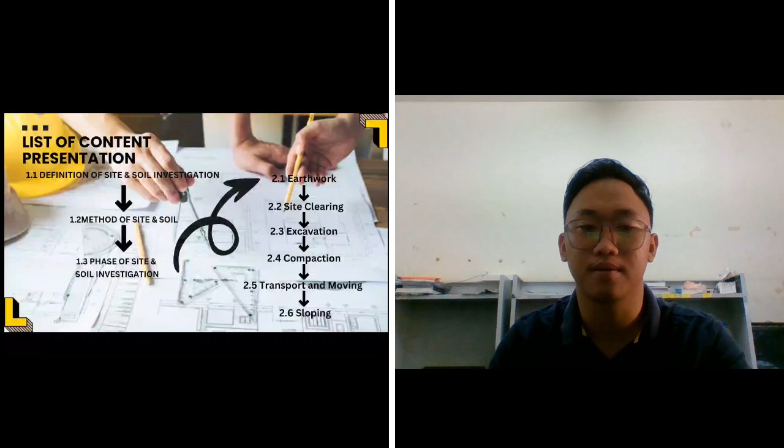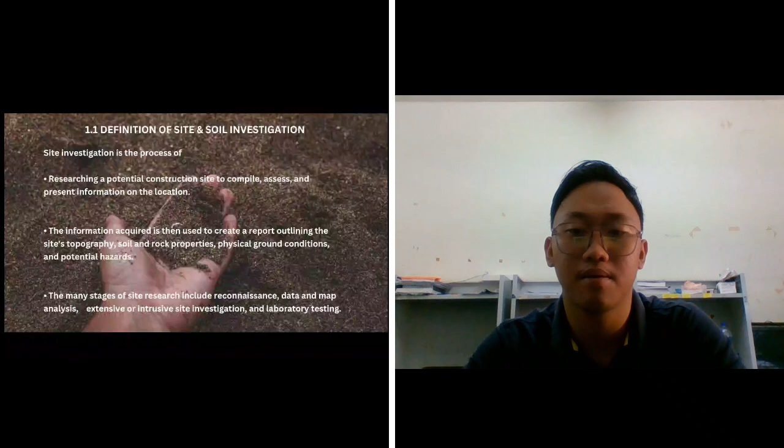What is site investigation? Site investigation is the process of researching a potential construction site to compile, assess, and present information on the location. The information acquired is then used to create a report outlining the site topography, soil and rock properties, physical ground condition, and potential hazards. The main stages of site research include reconnaissance, data and map analysis, extensive or intrusive site investigation, and laboratory testing.

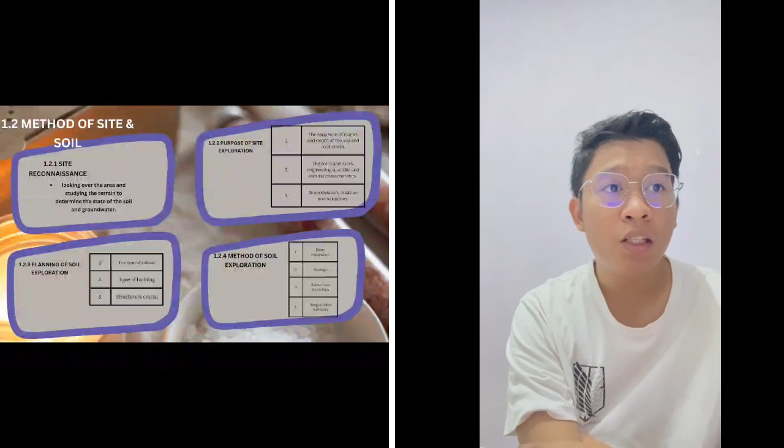1.2 Method of site and soil investigation. First, site reconnaissance is looking over the area, studying the terrain, and determining the state of soil and groundwater. The second is the purpose of site exploring: first, the sequence of layers; second, the soil, rock qualities and natural characteristics; third, groundwater location and variation.

The third is planning soil exploration: first, what type of subsoil; second, type of building; third, the structure is crucial. The fourth is method of exploration: first, open excavation; second, boring, surface sounding, and geophysical method.

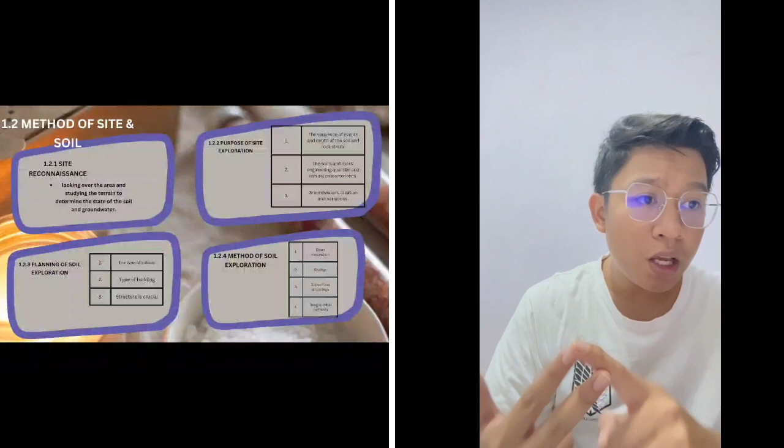Second is the boring method. For boring method, there are two: drilling holes and observing cuttings as they emerge from various depths, and lifting soil samples from various depths using a sampler. Examples of samplers include auger boring, shell and auger boring, wash boring, percussion boring, and rotary boring.

The third is subsurface sounding, which comes from SPT, standard penetration test, and cone penetration test, also called the Dutch cone test. The fourth is the geophysical method, including electric resistance method and seismic refraction method.

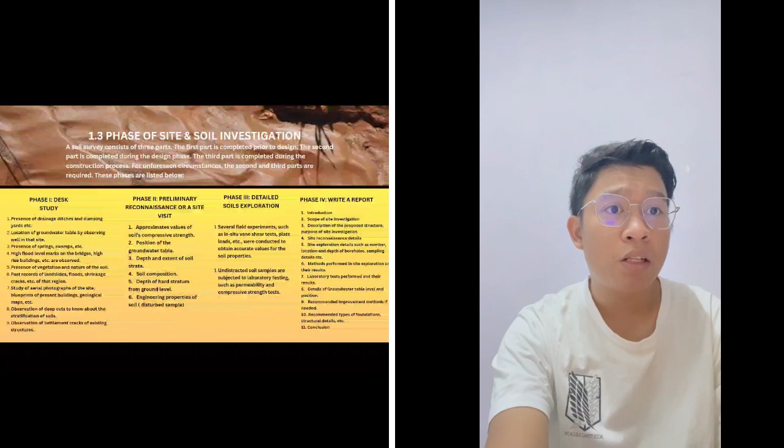1.3 Phase of site and soil investigation. A soil survey consists of 3 parts. The first part, prior to design, is the desk study. The second, completed during the design phase, is preliminary reconnaissance, also called a site visit. The third part, completed during the construction process, is phase 3, detailed soil exploration. For unforeseen circumstances, the second and third parts are required. The fourth part is writing a report.

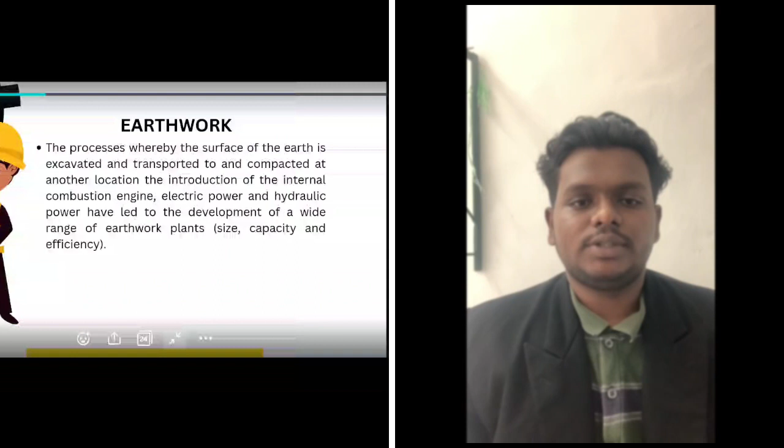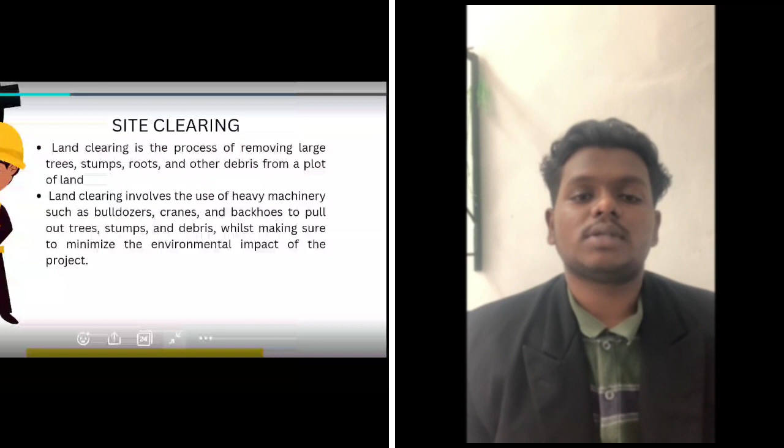Land clearance is the most effective way to prepare a place for development. Large trees, stumps, roots, and other debris are removed from a piece of land through the process of land clearing. This enables builders to continue the process of creating a new office building, a housing development, and a road. To remove trees, stumps, and other waste from the land, heavy equipment like bulldozers, cranes, and backhoes are used, while also taking precautions to reduce the project's negative environmental effects. The influence on local fauna has been minimized.

Workers can begin preparing the land for development once it is recovered after the ground has been cleared. There are 4 different excavations applied in these projects. Topsoil excavation, as implied by the name, entails the removal of the exposed highest portion of the earth's surface. Rock soil excavation is used to get rid of construction barriers like stone surfaces. Mud excavation: mud, a mixture of soil and water, is frequently present and needs to be removed during construction. Lastly, earthwork excavation.

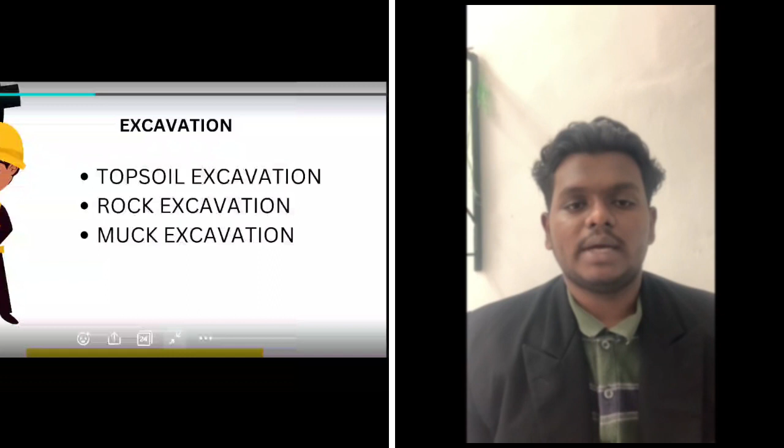Earth excavation for building involves removing soil or the layer below the topsoil. During the technique, wide and shallow layers of topsoil, pebbles, sands, and other unwanted materials must be removed. The technique also includes grading the land.

Trench excavation is frequently used for project foundations, sewer system service lines, and pipelines. This method of excavation has been used to dig shallow trenches up to 6 meters deep.

Dredging is a technique of excavating and removing underwater sediments and debris to make way for construction needs.

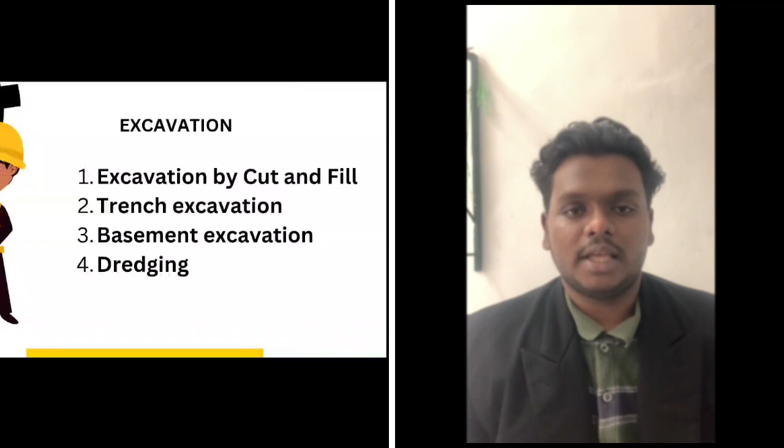CF220007. I will present one of the methods in earthwork construction, which is compaction. What is compaction? Compaction is the process of increasing the density of a soil by packing the particles closer together through the application of external force.

Compaction cannot be effectively achieved by track machinery, as tracks distribute the load over a wider area, effectively minimizing compaction.

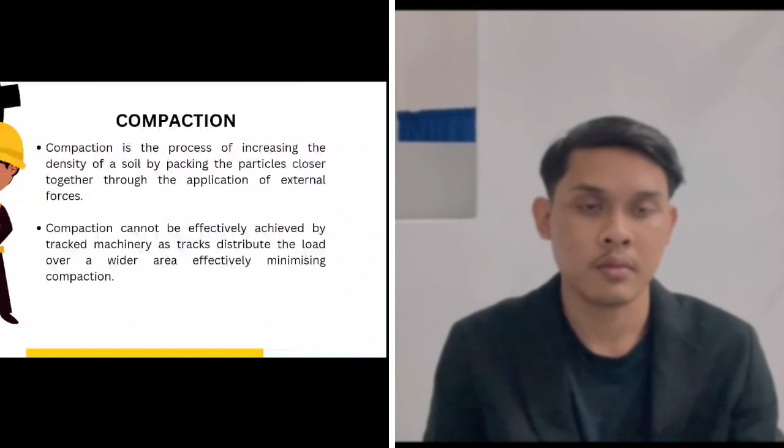Compaction process for cohesive soil. Compaction of cohesive soil is achieved by impact and weight to break down the cohesive bond and increase the soil density. Kneading compactors with high point loads, such as sheepsfoot and pad foot rollers, are required for cohesive soil. The strength of cohesive soil is influenced by moisture content.

Compaction process for granular soil. Compaction of granular soil can be carried out with static compactors that simply apply weight and tend to compact from the bottom of the layer up. Vibratory compactors use a mechanical action to consolidate soil particles. Impact compactors use high amplitude whack to compact material. Granular fills are usually suitable for fill construction, as strength is usually adequate over a range of moisture conditions.

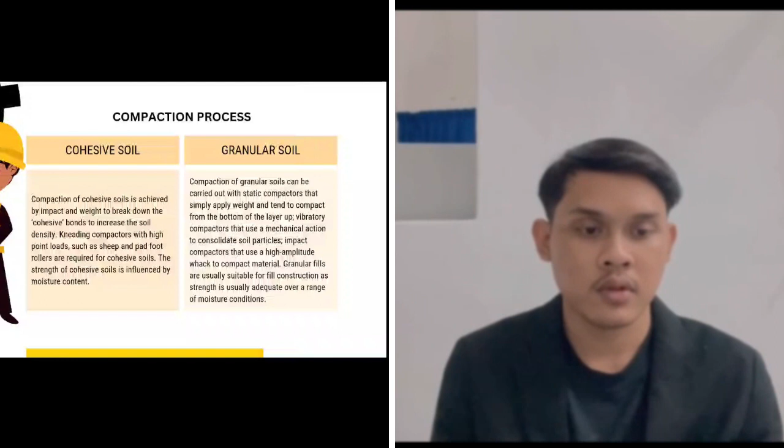The purpose of compaction: first, increase bearing capacity. Second, reduce compressibility. Third, reduce permeability. Fourth, improve stability. Fifth, heavy or highway versus building foundation compaction operation.

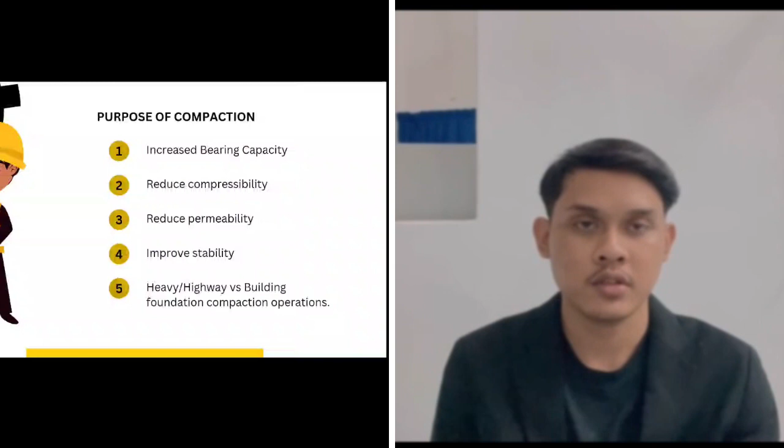Now I will discuss the factors affecting compaction. First, moisture content. To achieve the desired density of the soil, the moisture content has to be controlled properly. If the water content is low, it leads to soil being stiff, which resists compaction. When the water content is increased, lubrication takes place between the soil particles and the soil becomes more workable.

Second, type of soil. The soil type influences the compaction of that soil to a great extent. The coarse-grained soil can be compacted to a higher dry density than the fine-grained soil. The maximum dry density decreases if the quantity of fines is increased beyond the amount required to fill voids in the coarse-grained soil. Hence, it is safe to say a well-graded soil obtains a much higher dry density than a poorly graded soil.

Third, amount of compaction. The optimum water content required for compaction decreases with an increase in the compaction effort. This effect of increased compaction is significant only until the water content reaches its optimum level. After that, the volume of voids becomes almost constant and the effect of increased compaction is not significant.

Fourth, contact pressure. Contact pressure is the pressure between the soil and the wheel of the equipment used for compaction. This pressure depends on the weight of the roller, the wheel, and the contact area. Higher contact pressure increases the dry density and lowers the optimum moisture content.

Fifth, speed of rolling. There are two important things to consider. First, the higher the speed of rolling, the more length of embankment can be compacted in a day. Second, the higher the speed of rolling, there is a likely chance of insufficient time for deformation to take place, and hence more passes may be required to achieve the desired compaction.

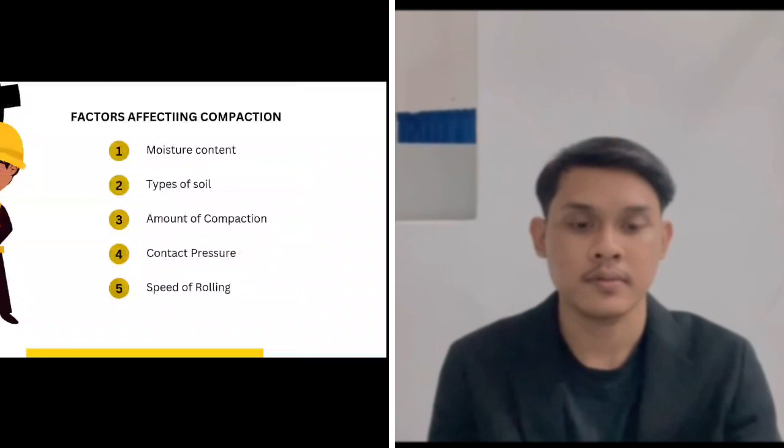There are 7 types of compaction equipment: tamping foot roller, grid or mesh roller, vibrating compactor, steel wheel or smooth steel drum roller, rubber tire or pneumatic roller, segmented pad roller, and tampers or rammers.

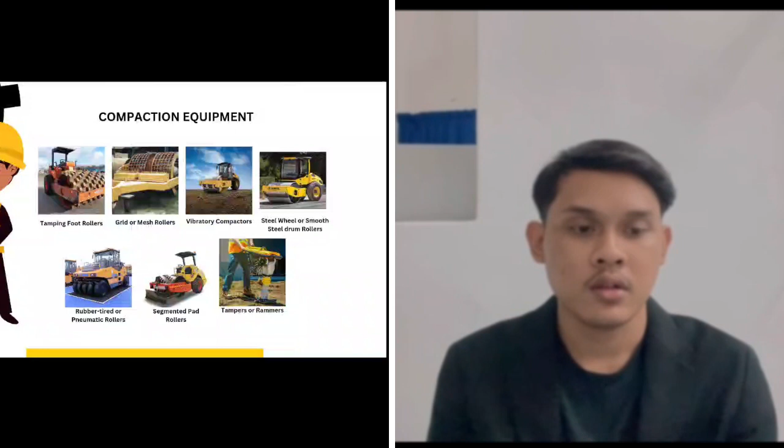There are 5 methods of compaction. First, static weight. Static pressure is the most common form of compaction. Virtually all objects exert some degree of static pressure compaction.

The greater a particular weight, the more static pressure it will exert. Second, impact. Both static pressure and manipulation harness the power of gravity to accomplish a compaction. Impact compaction takes a more proactive approach. Here, the compactor literally hits the surface of the ground. This contact increases the amount of force it exerts. It also sends a localized pressure wave straight down into the ground.

Third, vibration. Vibration forces are closely related to impact force. In fact, the two can be easily confused; where impact compaction involves force that moves straight down, vibration compaction consists of pressure waves that spread out through the ground in all directions. Fourth, manipulation or kneading. Manipulation, also sometimes referred to as kneading, acts to compress material at a greater depth. It does so by reducing the surface area at each particular point of action. This enables the compactor to exert a more localized and hence greater amount of force in each particular area.

Finally, percolation. The concepts of percolation theory are used to elucidate the formation of a tablet by compression of particulate matter. The process of compaction can be considered as a combination of site and bond percolation phenomena. Because of the effect of different particle size and shape of the particles in the powder bed, and the effect of particle fracture and plastic flow, moisture content of the powder and finite size of the tablet, no sharp percolation threshold is expected.

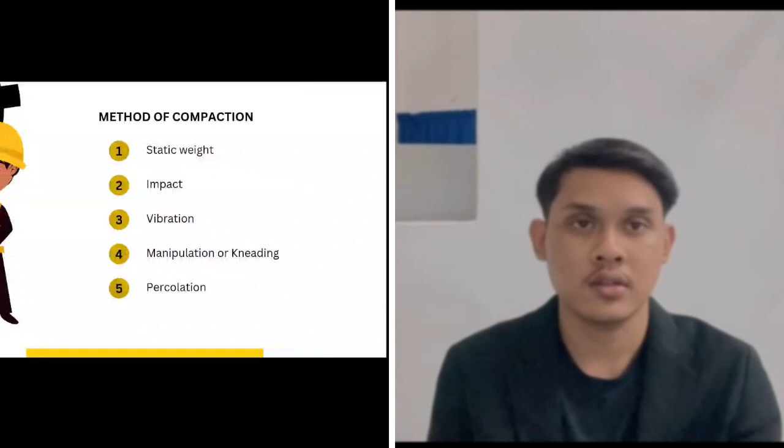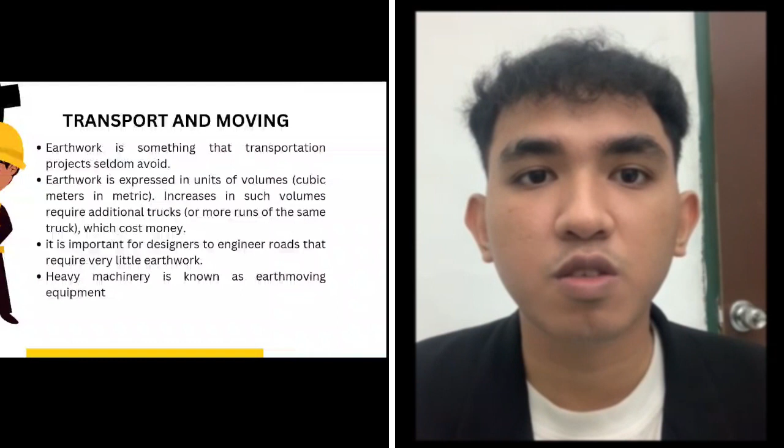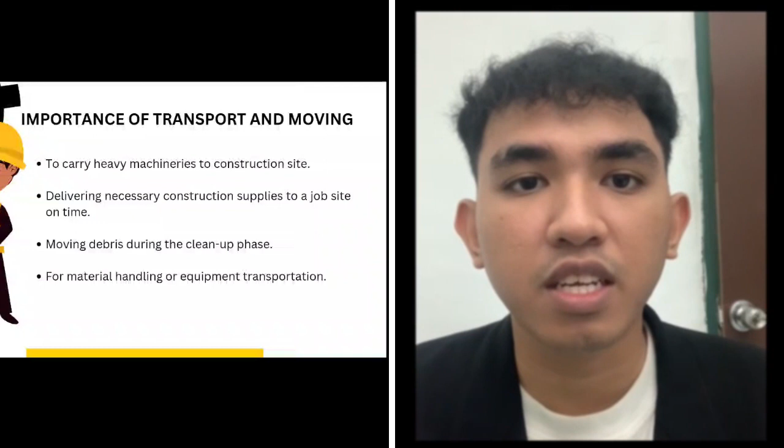Next is the importance of transport and moving. Firstly, it is to carry heavy machinery to the construction site. Next is delivering necessary construction supplies to the job site on time. Furthermore, it is to move debris during the clean-up phase. Lastly, it is for material handling or equipment transportation.

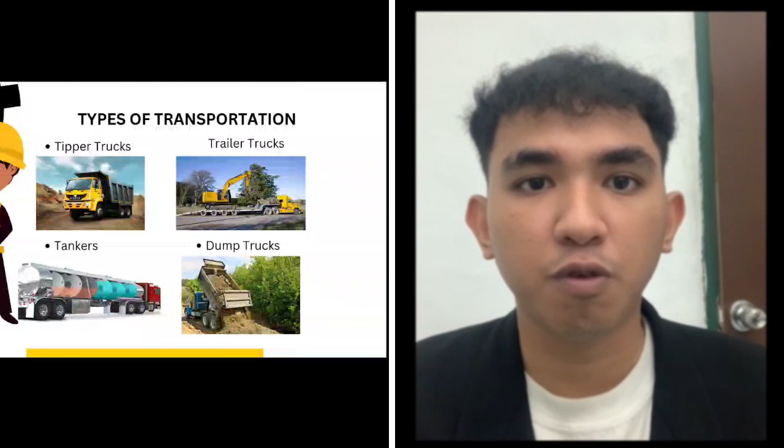There are a few types of transportation, such as tipper trucks for dumping large quantities of loose material. Secondly, trailer trucks for hauling equipment and supplies long distance. There is also the tanker, which is for transporting materials on highways and through job sites. And lastly, dump trucks, which are for quickly hauling and dumping their loads.

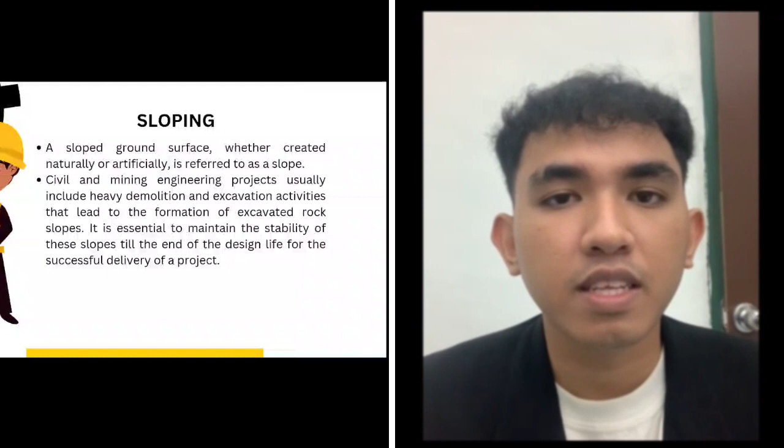Moving on to sloping. A sloped ground surface, whether created naturally or artificially, is referred to as a slope. Civil and mining engineering projects usually include heavy demolition and excavation activities that lead to the formation of excavated rock slopes. It is essential to maintain the stability of these slopes till the end of the design life for the successful delivery of a project.

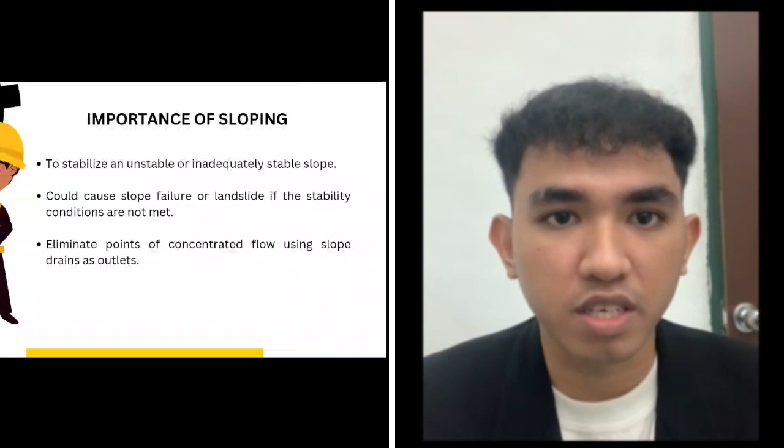The importance of sloping is as such. Firstly, it is to stabilize an unstable or inadequately stable slope. Secondly, there could be slope failure or landslide if the stability conditions are not met. And thirdly, it is to eliminate points of concentrated flow using slope drains as outlets. There are 3 types of slope stabilization methods.

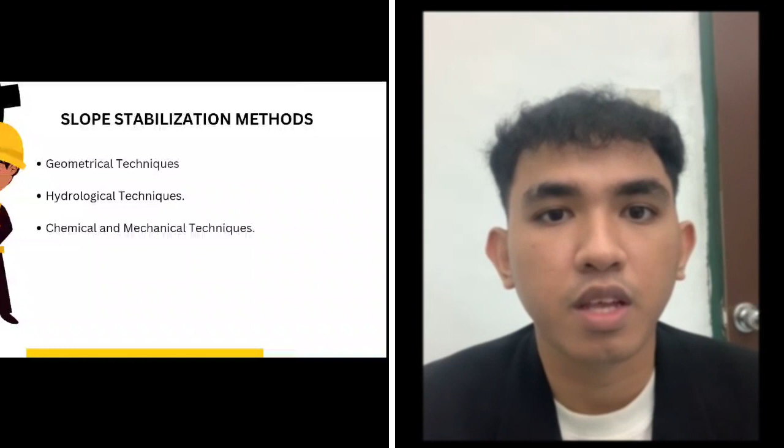There are also many stabilization strategies to reduce slope failure, one of them being providing drain pipes and drain holes or use of dowel bars. Also, installing rock anchors and flattening of overburden slopes could reduce slope failure. Last but not least, constructing concrete or masonry walls with weep holes could also greatly improve slope stability.